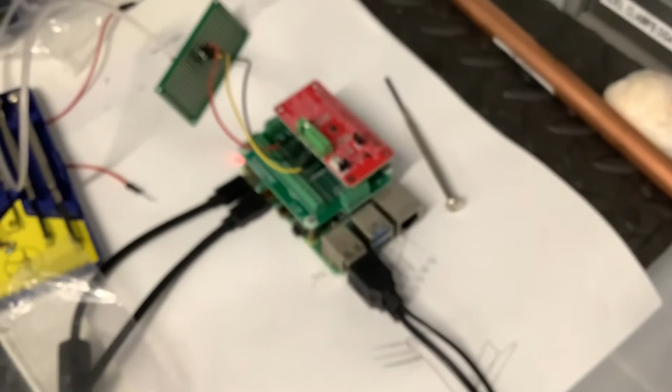This is awesome. Anyway, I just came across that, thought I'd show you. The other thing, not necessarily a question, but something I'd like to run by you. We've got this little test setup. This is for my Tide station, kind of a replica of what I've got at the dock. It's a little Raspberry Pi. Let me get focus here on it.

This thing measures the tide pressure. Right now I have a PVC tube. My test setup, I'm using a copper tube and a balloon, as you can see, just to provide a little bit of pressure back into the system. With this test setup, I inflated this balloon and hooked it up to the sensor. This is the little pressure sensor, a Honeywell pressure sensor back here. Where is it? There it is right there. Not an expensive device, I think it's like 30 bucks. This whole setup costs less than 100 bucks.

By measuring the pressure changes as a result of the tide, I can measure the height of the tide. But this is just a test setup to test the integrity of my connections here. What I did with the copper tubing, I sweated on a little nipple on the end of it, soldered it using the torch. I want to make sure it's leak proof. So I put this balloon on the end, inflated it, and now I'm monitoring the pressure through the sensor. That's over here on my display. It should be pretty much a straight line.

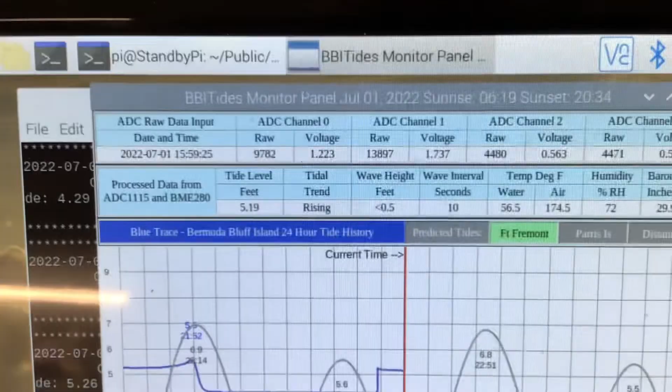As you can see, this is a previous test over here, and this is the current test up here. The pressure reading shows the tide level equating to 5.19 feet with the pressure I have in there. On the previous test, I expected that as this balloon deflates, the pressure would drop, but that's not the case. As the balloon deflates, you can see on this line up here, the pressure remains fairly constant. Right at the end there's a little uptick, and then when all the pressure goes out of the balloon, it drops back down.

So what this means to me is, rather than containing a varying pressure according to the amount of air in the balloon, it's fairly constant pressure as the balloon deflates. That's kind of non-intuitive, it goes against what I thought it would be, until at the very end there's just a slight increase and then a diminishment of the pressure. So what am I not seeing here about this test setup? This is the best I can come up with.